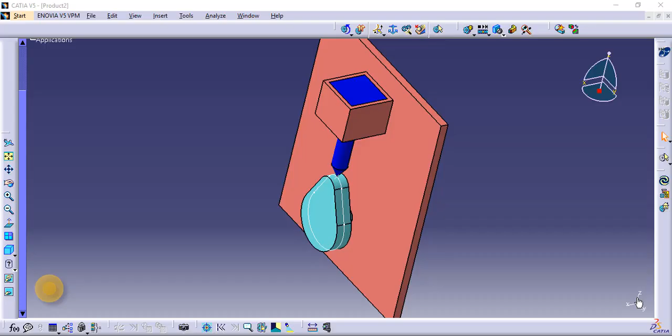This video tutorial describes the use of point curve joint in CATIA V5 DMU Kinematics. This is a simple assembly. You can create it in Part Design Workbench and assemble it in Assembly Workbench.

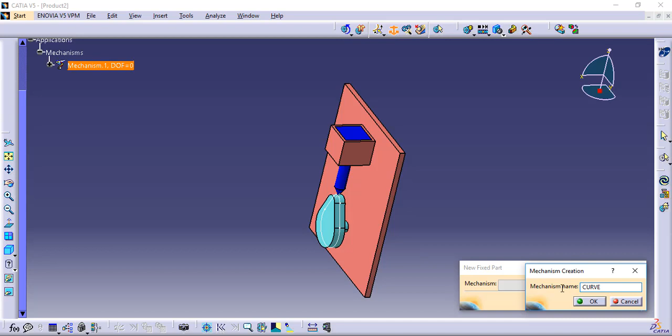First of all, create a new mechanism by applying this part as fixed. Three joints are required: one is revolute, second is prismatic, and third one is point curve joint.

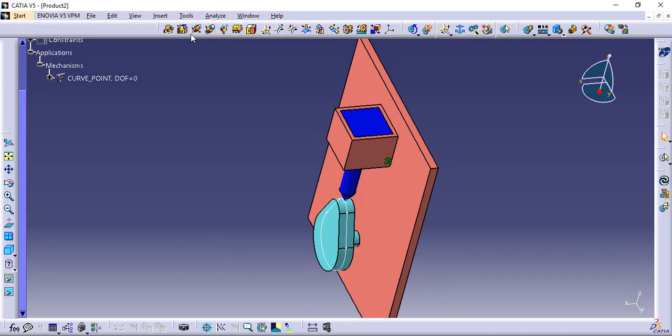Let's start. First joint is the revolute joint, as the cam rotates about the fixed part, so a revolute joint is required. Do not check the angle driven, as the command driven joint is the point curve joint.

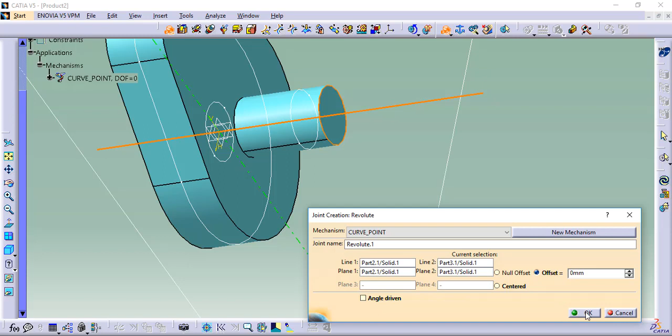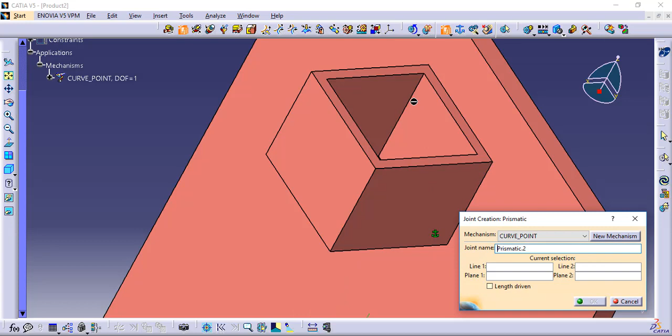Second joint is prismatic, as the follower has a sliding motion. Here also, do not check length driven.

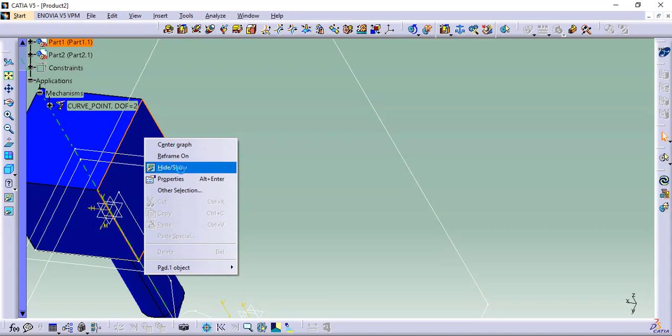Third joint is point curve, as the follower follows the path of the cam profile curve. Here, check length driven.

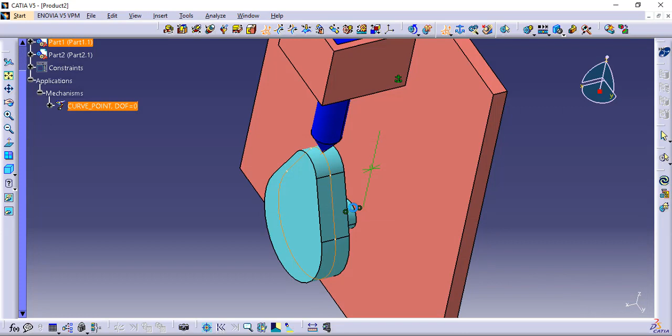Now you can check whether the mechanism is working or not by clicking Kinematics Simulation. Here you can change the length span.

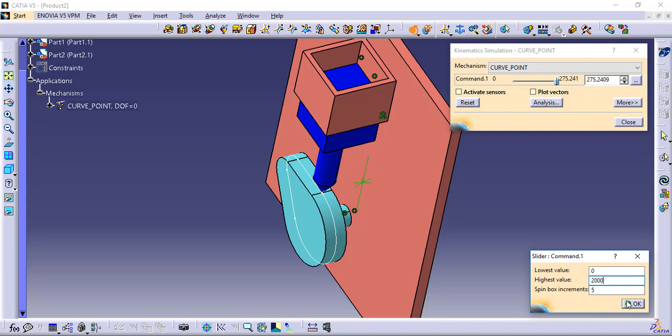Generate the task by creating a simulation. Insert the tasks one by one, and then play it.